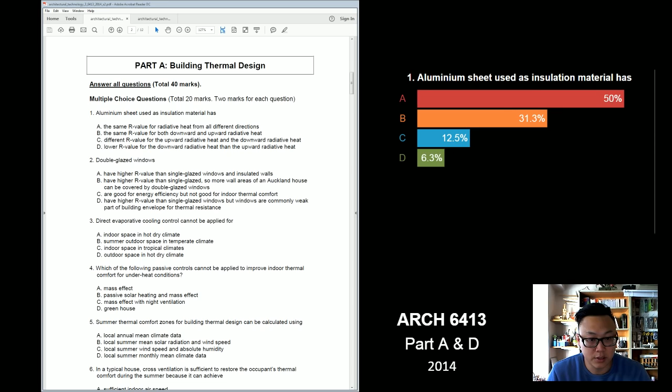Ta-da, wait. So that's the vote, most people voted for A. Oh wait, does it show or not? There's quite a big delay, but it's alright. Okay, so let's go to the next question. Gonna turn that off. Next.

Well, all direction. I had a discussion with Joseph last time, because they were just talking about the aluminium material itself, because it could be put on the walls, on the ceiling, on the floor, so then you don't know which one is up or down. So just to be safe, I've chosen all direction. And because it's a paper, there's only two sides. But yeah, not really sure, but I think 'all direction' should be the correct answer.

Okay, so we get 13. I'm gonna show you the result for this one. So double glazed windows have a higher R value than single glazed windows, but windows are more commonly the weak part of the building envelope for thermal resistance.

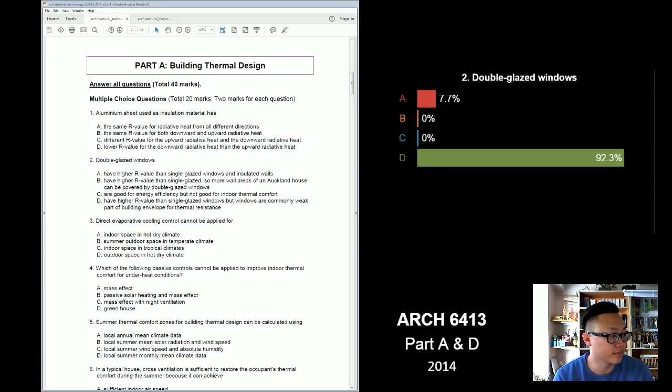And okay, next question. Oops, next. Direct evaporative cooling cannot be applied for...

Okay, we got 15 votes, gonna show you the answers. So most people say direct evaporative cooling cannot be applied for indoor space in tropical climate, and I think that's the right answer because tropical climate is already humid, you don't want to add more humidity in the interior space, so it cannot be applied.

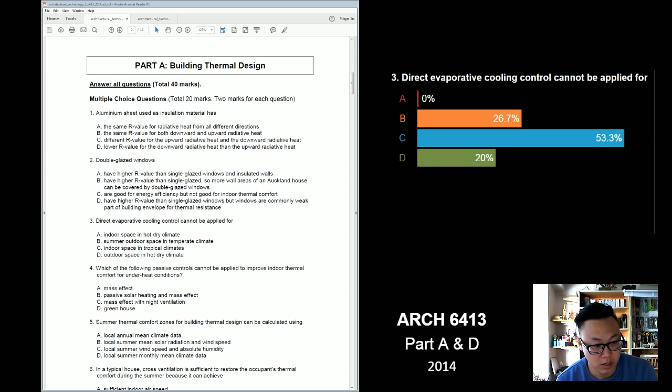Next question. Which of the following passive controls cannot be applied to improve thermal comfort for underheat condition? So it means cold conditions.

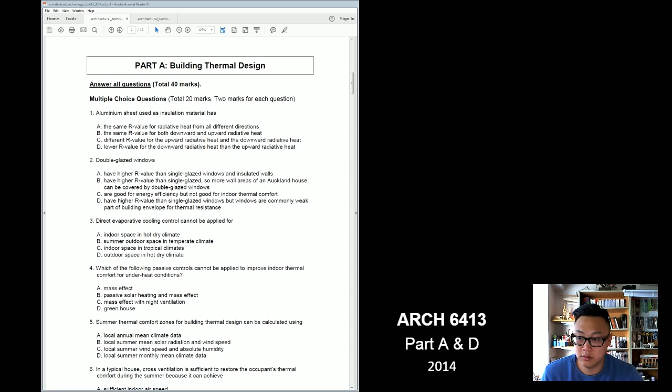Okay, I'm just waiting for at least 15 people to vote to show the answers. Okay, we got 15, so the answer is C, mass effect with night ventilation, because night ventilation is usually used to cool the structure to make the place colder, so that's not needed in a place that's already cold.

Next question. Thermal comfort zone for building thermal design can be calculated using...

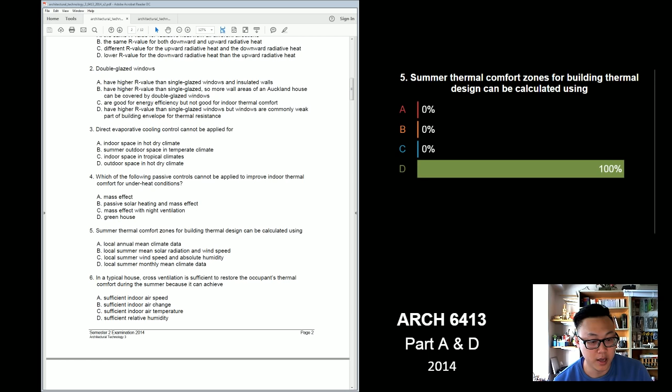Okay, next. In a typical house, cross ventilation is sufficient to restore the occupant's thermal comfort during summer because it can achieve...

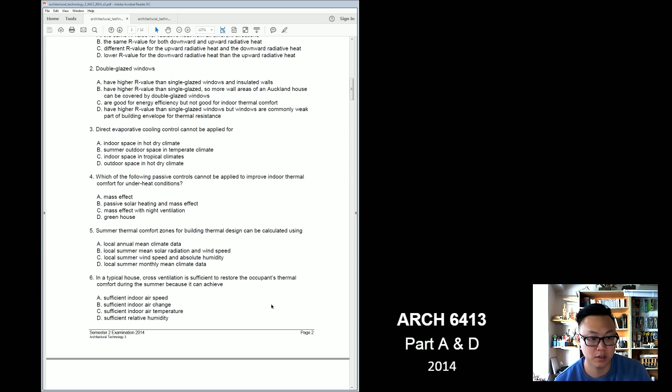Okay, we need 2 more. Okay, now we get 15. So the answer is A, sufficient indoor air speed.

Okay, now next question. For an Auckland brick veneer house, wall insulation materials are located at the internal surface of the wall and not located at the external surface of the wall because...

We need more votes. Okay, I guess for this one, it is really going to be up to you which answer you think is right.

Okay, I'm going to show you got 15 votes. So those are the answer. Most people choose A, building thermal designs for temporary heating. I'm not too sure about that. I thought that building thermal design was trying to get a comfortable thermal interior for the whole year.

For this question, my answer was C, put insulation in interior, because when you read that question, they're asking why did they put it inside and not outside. For me it was because if you put it inside, it increases the R value. But it's up to you to decide which answer you think is right.

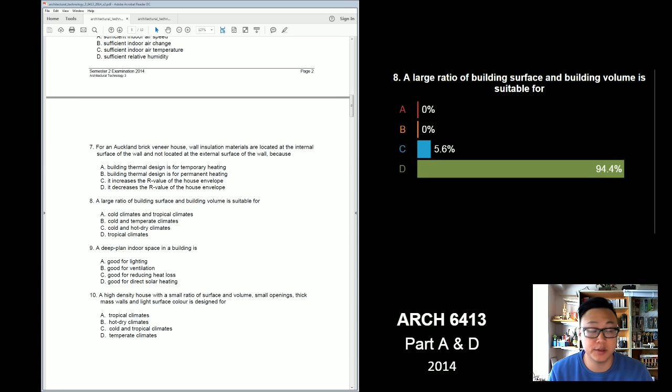Next question. A deep plan indoor space in a building is...

Okay, because we had that same question in the 2015 paper, but I think the answer would be different, so it'd be good to check with 2015 which one was added, because this one you can already remove as a wrong answer, I guess. Let's see, I'm gonna go for...

Okay, we got 15 votes. So those are the answers. Most people selected C, good for reducing heat loss. I guess because the deep plan usually they say to use in maybe tropical climate, and the purpose of it is to reduce heat gain.

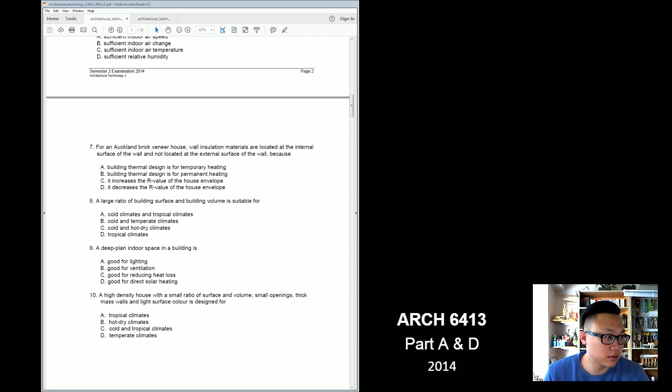Okay, we got 15 votes. So the answer that most people chosen is B, hot dry climate. I think for this question, I always think about Greece, like the photo he showed us, all the white buildings, small windows, no pitch roof. That's typical of a hot dry climate. And you have to remember for temperate climate, I think. Yeah, I don't know, but I think it's hot dry climate for that question.

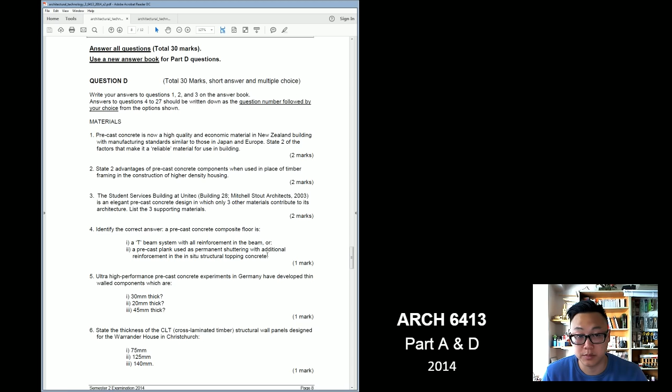Next question. For this one, we finished part A. I'm just gonna scroll to part D. Okay, and we're gonna start on this one, number 4.

Okay, people start voting. Who's gonna be the boss? Who's gonna click 3? The fuck? Noobs. We're doing number 4, right? Okay.

Okay, so those are the answers. Obviously, it's number 2. Okay, next question.

Ultra high performance precast concrete experiment in Germany have developed thin wall components which are... Just had 2 votes.

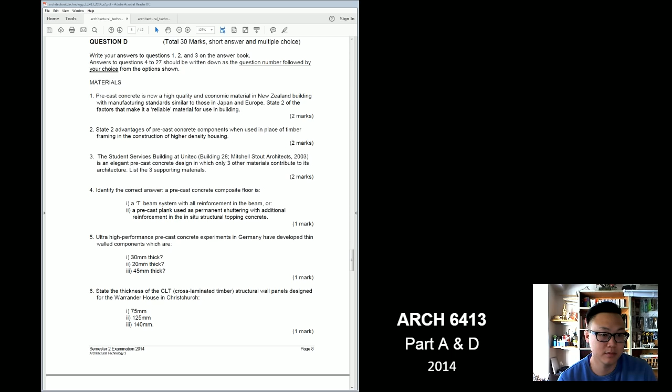It's okay, we get 15 votes. Those are the answer. Answer 1, 75 mil. Let's go to the next question.

Murray Grove House is a 9-story apartment block in London designed by Waugh Thistleton architect. The primary purpose of the plasterboard lining is... We got that question in the previous stream. It was the report.

Okay, so here's the other answer. It's used to provide fire protection to the CLT structure.

Okay, now we're gonna start to do some new questions that weren't in the previous exam. State the average water consumption measured per person per day in New Zealand. What was my answer for this? Hold on.

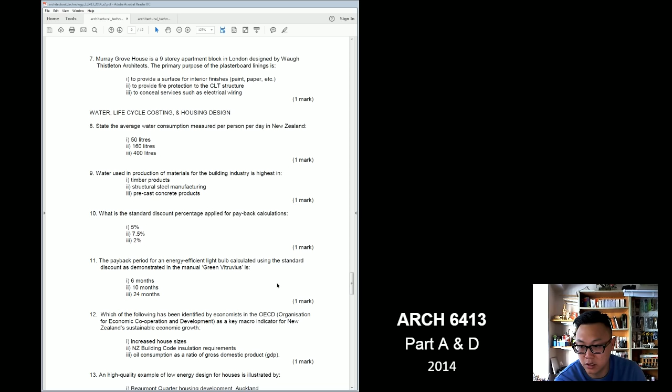Oops, where is my... Okay, so: oil consumption as a ratio of gross domestic product, GDP.

Next. A high quality example of low energy design for houses is illustrated by...

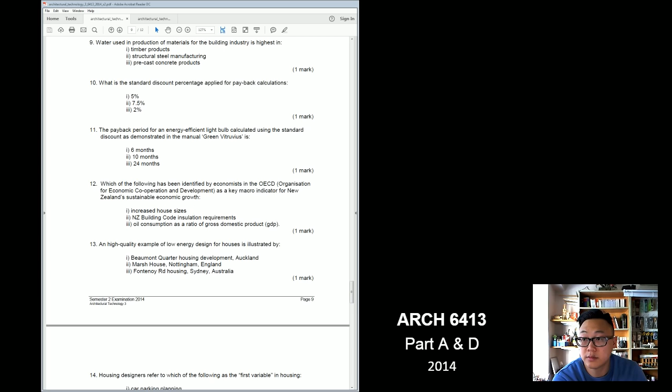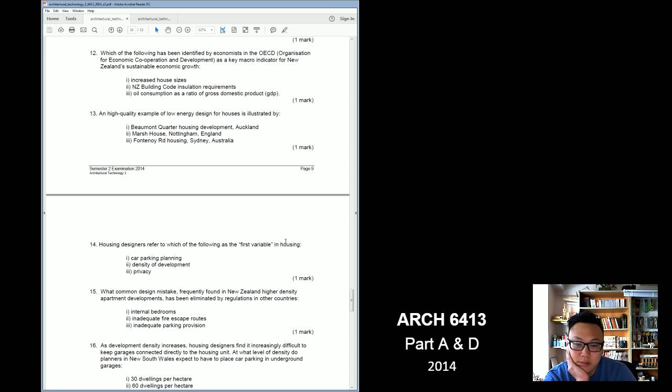Okay, is that the answer? Marsh House, Nottingham, England.

Next. Housing designers refer to which of the following as the first variable in housing?

Okay, most people selected density of development.

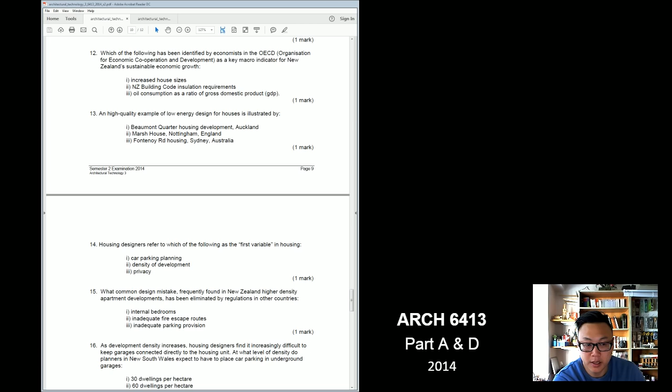Next question. What common design mistake frequently found in New Zealand higher density apartment development has been eliminated by regulation in other countries?

Internal bedrooms. Next question.

As development density increases, housing designers find it increasingly difficult to keep garages connected directly to the housing unit. At what level of density do planners in New South Wales expect to have to place car parking in underground garages? What did I write for that?

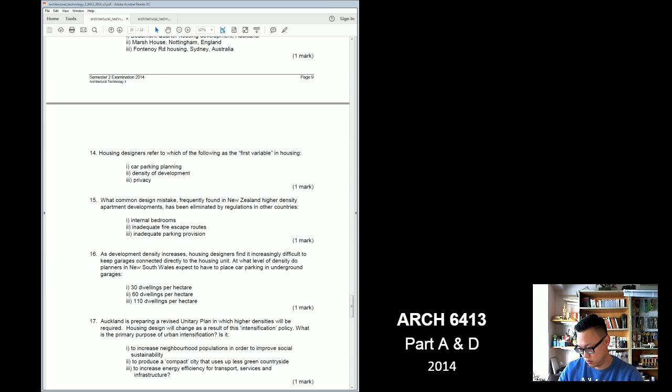Come on, one more. Or are we just 14 now? Up, okay, 15, 16. Windows. So, 60 dwellings per hectare.

Next question. Auckland is preparing a revised unitary plan in which higher density will be required. Housing design will change as a result of this intensification policy. What is the primary purpose of urban intensification?

Ooh. Okay, this time we only have 12 people who voted, and yeah, it's pretty close. So those are the results.

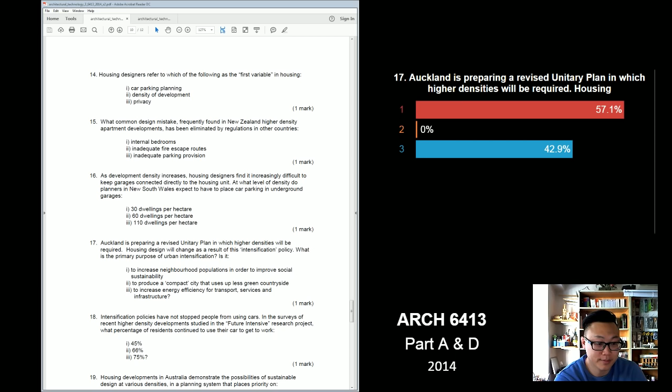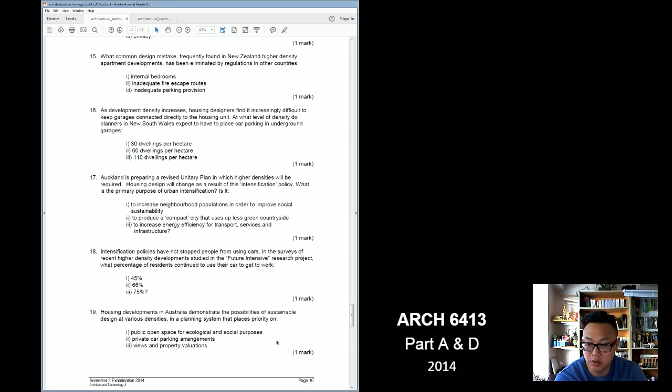Next question. Intensification policies have not stopped people from using cars. In the survey of recent higher density development, studied in the Future Intensive Research Project, what percentage of residents continued to use the car to get to work?

Yeah, I wasn't sure too for 18. I feel like this one everybody's just guessing. Because I actually tried to read the Future Intensive study, there's like a 200 page document, and they were showing some graphs, but they didn't have an exact number for this question. So it was just a guess.

So here's what other people guessed. Most people chose 66, and that's out of 13 people. So, yep, next question.

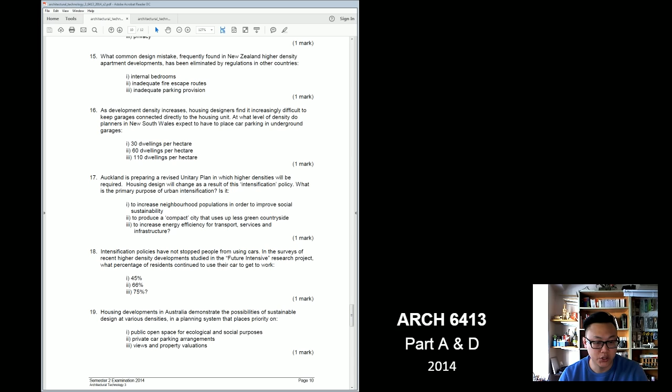Housing development in Australia demonstrates the possibilities of sustainable design at various densities in a planning system that places priority on... Let's see.

Research what the future intensive... I mean, I've looked at it and I couldn't really find the exact figure. But I guess there'd be a pretty high percentage of people still using cars, because the transport here, like train or buses, isn't that reliable yet, I guess.

Okay, so here's the answers. Number 1, public open space for ecological and social purposes.

Yeah, I really don't think the priority would be car parks. I think that's something a lot of people try to remove.

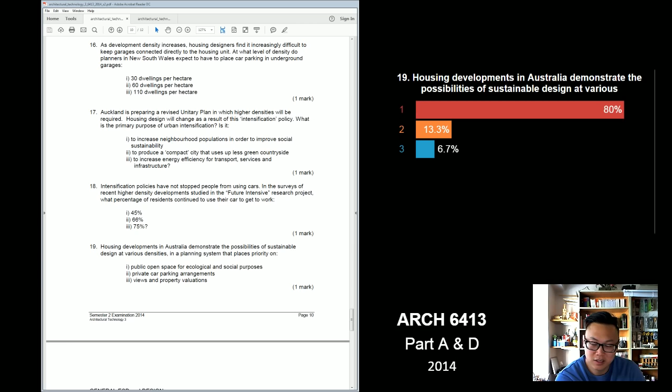Next question. All performance evaluation systems for estimating and predicting building sustainability use weighted factors such as energy, water, level of emission, site selection, and so on. This factor varies according to...

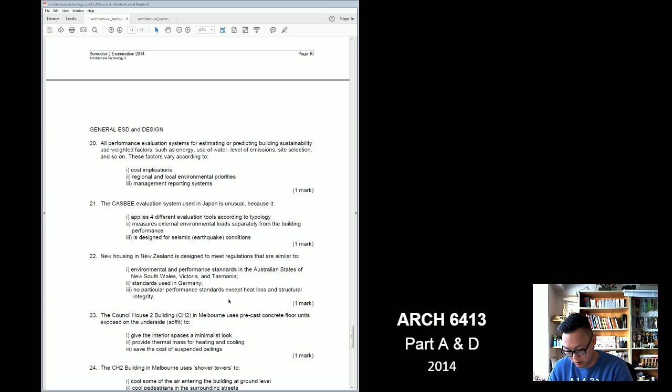So the answers are: regional and local environment priorities. I think it's because different councils have different wants and needs. Yep.

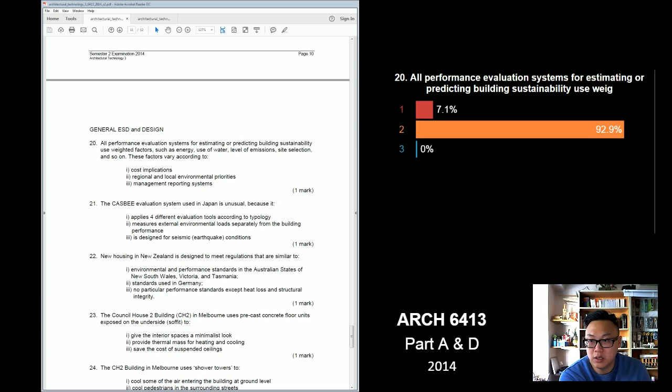The CASBEE evaluation system used in Japan is unusual because it... come on, vote. Who's in the chat? Okay. Measures external environment loads separately from the building performance.

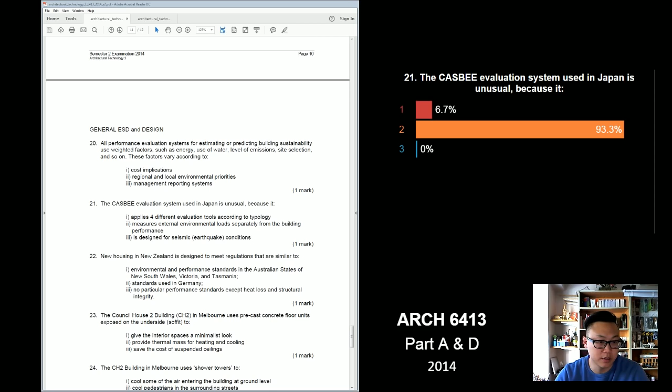Next question. New housing in New Zealand is designed to meet regulations that are similar to...

Okay, we only got 12 votes, but here's the answer: environmental and performance standard in the Australian states - New South Wales, Victoria and Tasmania.

Yeah, I think I've read that somewhere that we're using Australia as a guide. They do everything before New Zealand, so we just need to copy them.

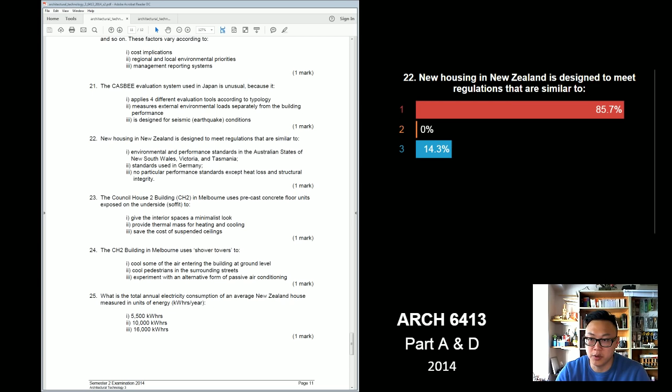The Council House 2 building, CH2, in Melbourne used precast concrete floor units exposed on the underside soffit. When I think soffit, I think of the roof eave - usually if you have a type of plasterboard or soffit lining just underneath to hide the rafters. So why would they use that?

Provide thermal mass for heating and cooling. Yeah, I think that's the most accurate answer.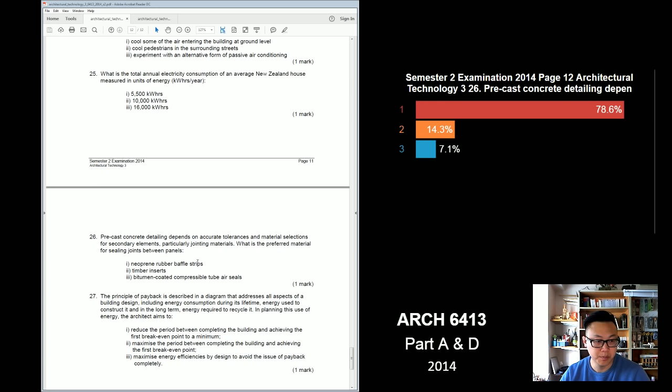Okay, this one's a long question. The principle of payback described in a diagram addresses all aspects of a building design, including energy consumption during its lifetime, energy used to construct it, and long-term energy required to recycle it. In planning this use of energy, the architect aims to...

Come on, we need more votes, only 4 so far. We got a tie - come on, just 6 votes.

Yeah, I mean it's okay to guess, it's more about saying what other people think the right answer is. In the end you're the one choosing it, but okay.

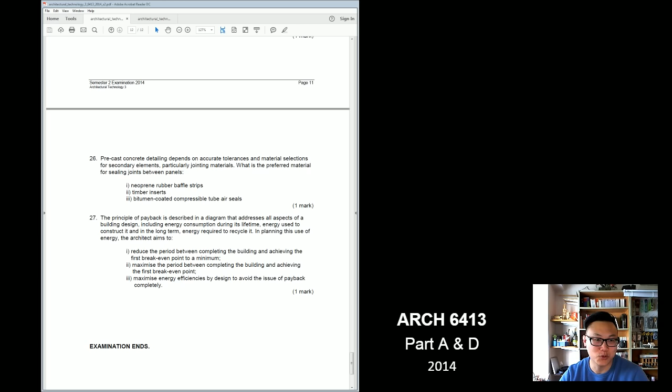Okay, I'm sure like this one nobody is really sure, so I'll show you what everybody voted - maximize.

I think it's important to have the payback because in 2013 there's a question asking how do you motivate the client to integrate sustainable design in the project, and I think the answer was to show them the profit they can get into the payback. So I actually chose number 1 because the faster you get to that break-even point, the faster you make profit on the building. That's why I chose number 1.

For those who chose number 3, do you have any reasoning behind it, or is it just a guess? No, that's my opinion - if you think 3 is correct, you should go with 3. I don't know 100% if this is correct, so...

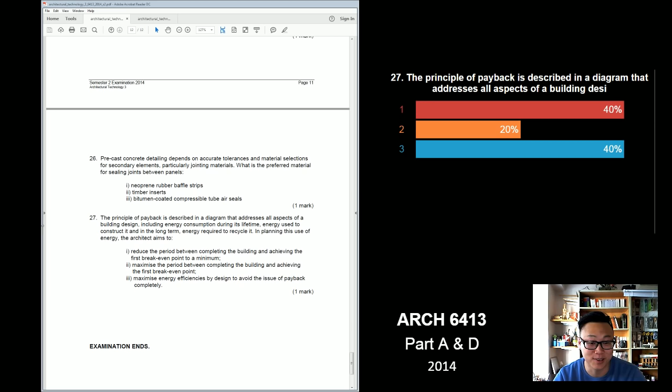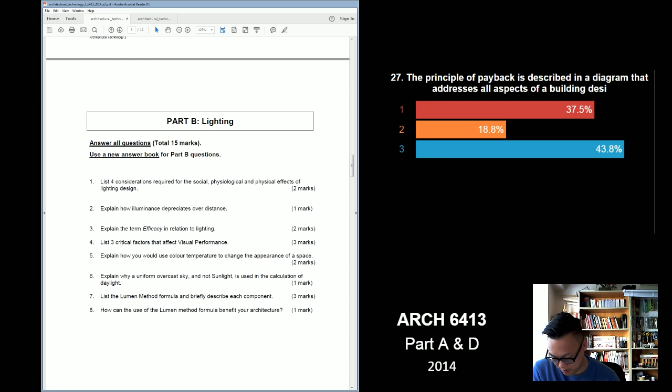No? Oh, maybe we can do the short question - I think there's a short question on this one. Or maybe we can, do you want to do this first?

Rohan. Okay, list any two functions of the courtyard. What do you guys think? Any suggestions? The one that I have was shading and creating an open living space.

Oh, direct evaporative cooling - I think it's only evaporative cooling if you put a pond into your courtyard. So when you have water, it will humidify the space. But I mean, you could say that courtyard allows you to put a pond. I'm pretty sure shading is first, and for the second one, I had another one which was reducing dust.

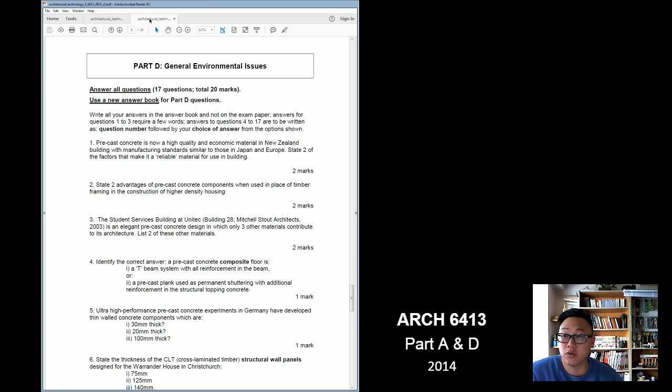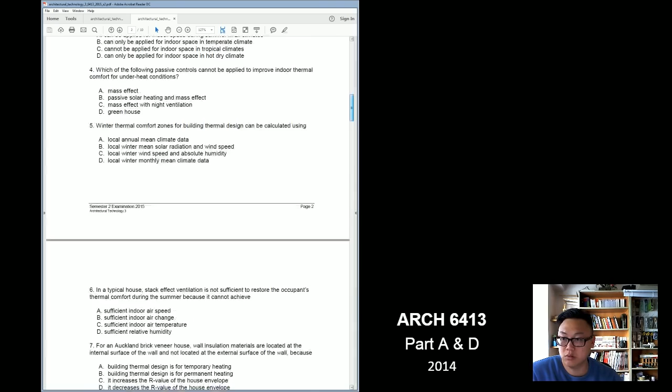I'm sure there's one from 2014 and 2015 as well, because this one is 2014, and if you click here, there's the 2015 paper. Oh no, 2015 doesn't have it. Oh well, it's just 2014 then.

But yeah, I think it's shading and open space. Okay, list any two functions for the veranda. My answer is shading, protection from sun, and increase cross ventilation.

I'll just tell you guys my answer. If you think you have other ones, feel free to comment so everybody can have some ideas.

List any two types of climate where mass effect can be used in the envelope of a building. Come on guys, give me some answers.

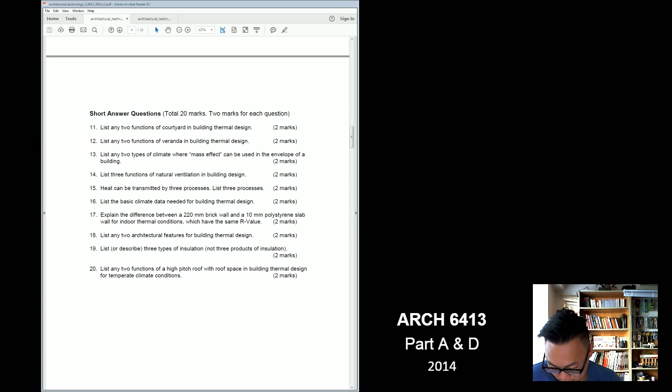Hey Damon, are you talking on Facebook? Just type on the chat because I'm not reading the Facebook page.

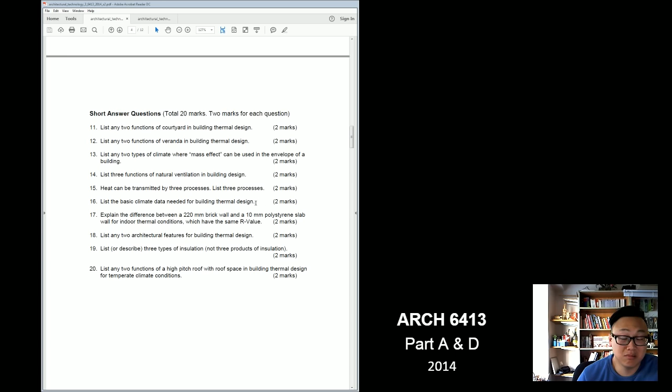Okay, let's quickly go over lighting. List 4 considerations required for the social, physiological and physical effect of lighting design.

So, any guess? One of my guesses is make people feel safe and comfortable.

So I think it's from the slide where he was showing the path in the park. It's important to get good lighting so you feel safe, you know where you're going. Energy efficiency, complement of the lighting.

I think it also has to be appealing to people, so make it look nice, pleasing to the eye, be suitable for the task, and be complementary and not conflict with other lighting. So I think all of those are good answers.

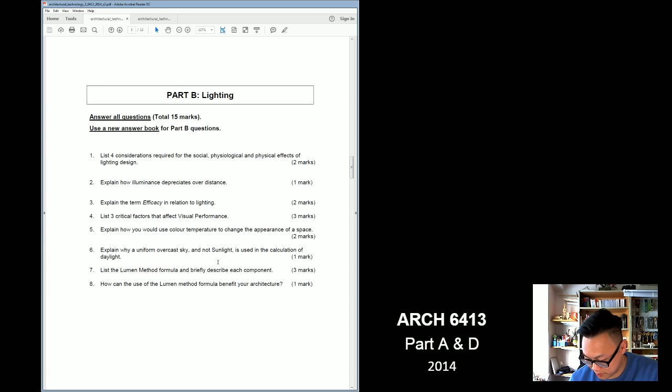Explain how illuminance depreciates over distance. For this one, I just say that the further away the light gets, the less intense it's gonna be. I think in the lecture there was an example about a lamp of 1000 lumens concentrated into 1 square meter, giving you 1000 lux. But if you increase the area to 10 square meters, it will only be 100 lux. So that's when you say the lumens depreciate or decrease as the surface area grows.

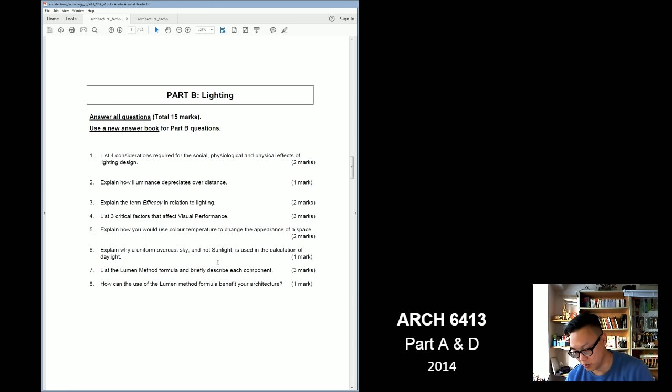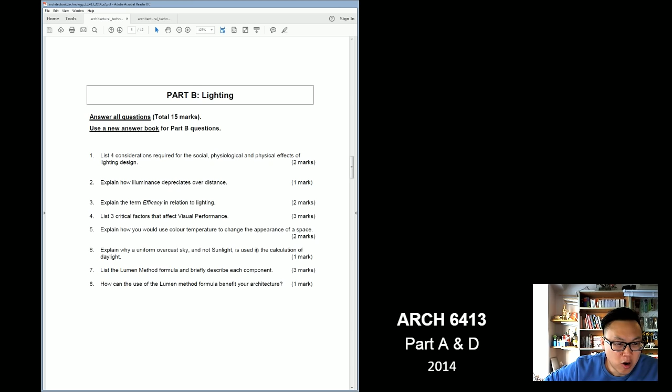I'll let you go to number 4. List 3 critical factors that affect visual performance. What did I write for that? I'm not too sure, because visual performance I think is related to how well you can do a task. So I was going to say contrast, and then the illuminance, like how bright the light is. And the task size as well, I think - the size of the subject.

Because I think for color rendering, it's more about how you make the space feel bigger or smaller, it doesn't really increase performance, in my opinion. But what Lee Maury said, depending on the size, if it's smaller it's really hard to see contrast. When there's higher contrast you can really separate the subject from the background, so it's easier to see. Task luminance, but then not too much, because then you'll have glare, which is not good for performance.

Yeah, but Nathan, you like giving a solution. I think they're asking for factors, so contrast is a factor - if you go up or down it will really affect your performance. Because electric light and daylight, if you change - I mean you could get the same type of light, you could get a daylight type of electric light bulb, so I don't really think that's a factor. But yeah, you get some ideas of what you can answer here.